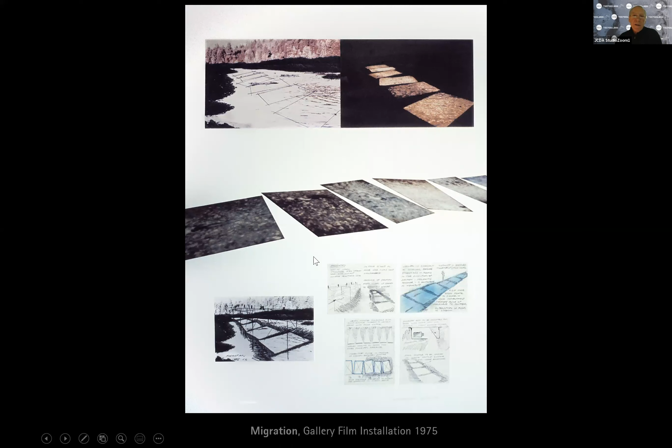Some of this early work, a film done in the mid-70s, early 70s, represented in New York at some galleries and in Europe, was a film installation dealing with the migration of salmon, with a series of film frames, a gantry built over the river with scaffolding, and a series of films shot down into the surface of the river that capture the movement and migration of fish up through this small river managed by the University of Washington.

The intent of this is all about studying qualities of light and understanding how our eye tends to focus on certain components of the visual information field in front of us.

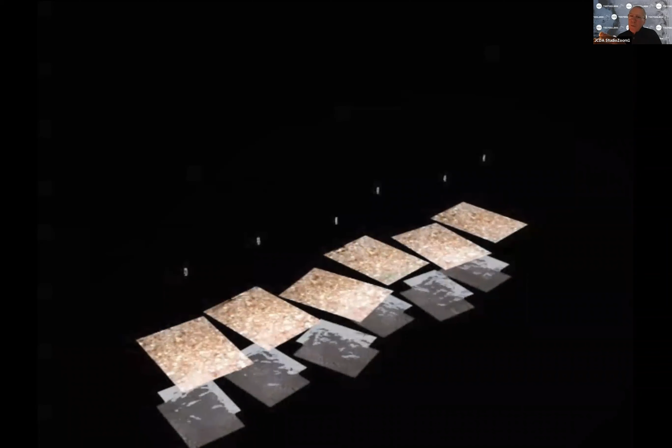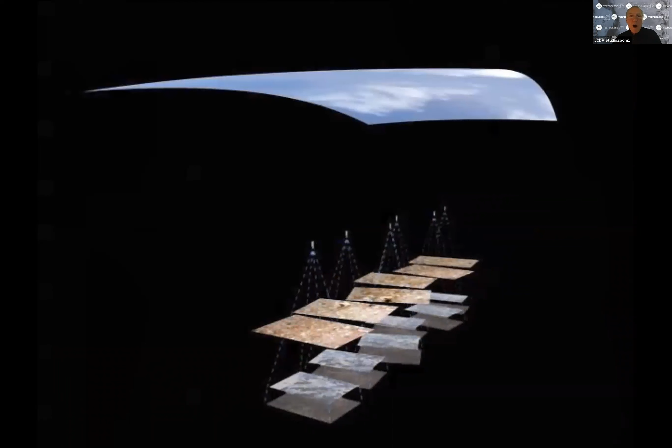And this sequence that you're seeing in real life is probably about 80 feet long, shown in a gallery where you walk into the space. You're essentially standing next to this river, observing this event happening. And by slightly altering the timing of the films, what you begin to realize the longer you look is that the information you're seeing is not necessarily just the movement of the fish below the surface of the river, nor the bottom of the river, but in fact the reflection of the sky overhead.

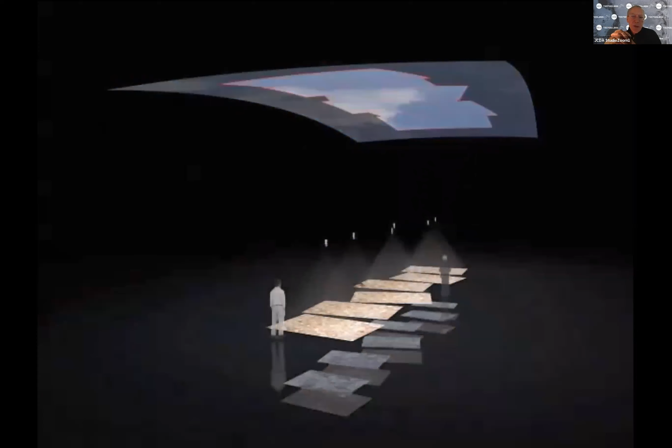So this idea of multiple fields of information overlaid on each other, both the reflected image and the image contained within the material, the image seen beyond the surface - this idea of layering of information, layering of fields or qualities of light, is really what the work is about. In this instance, this idea of migration really captures this way of extending our understanding or ability to understand a context.

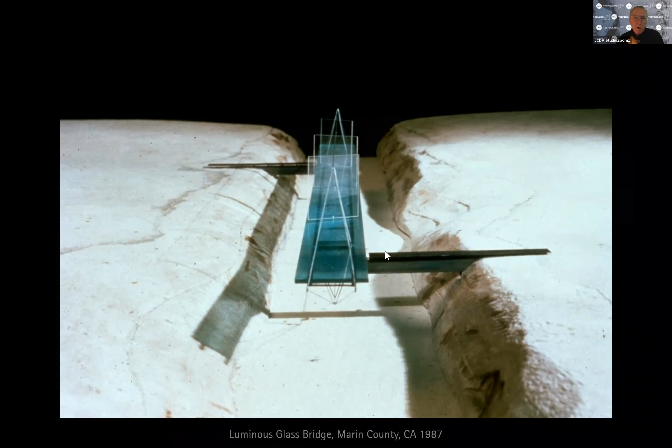And in that moment when you're actually moving or crossing the river, you're moving with the current or against the current. The whole idea here is that the quality of light falling on the surface of the river reflects back up and creates this projection surface upon which you're walking.

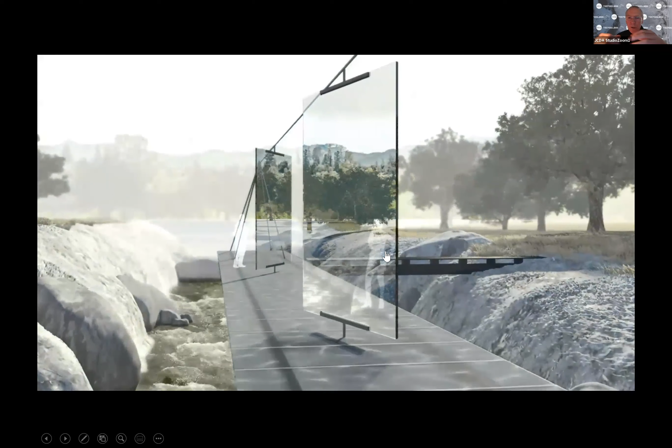This is a whole component of what we try to work on in the studio - how do you begin to get people more deeply involved in a particular ecology, have the moment to take a break within their day to realize there's something else happening. Try to have that realization become a moment of meditation, a moment of repose, or a moment of collective understanding of qualities of nature around us that we often don't pay attention to.

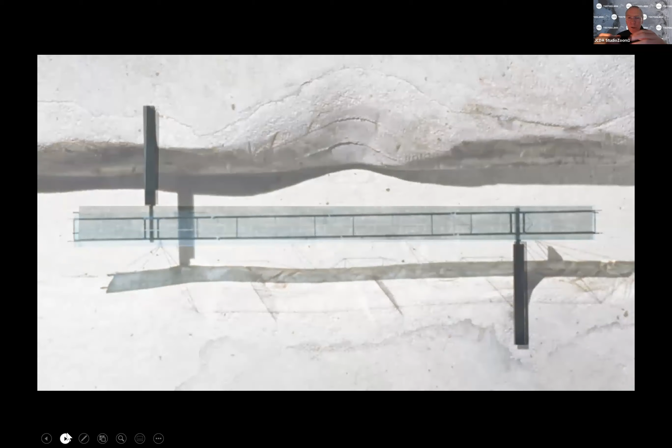These earlier projects led to other projects here in the city - this is jumping forward. I mix things chronologically here, but they're all linked together with this notion of light. This is a project here in New York with Foster, a firm we've worked with since very early, since the 70s. I worked on the Hong Kong project for them a long time ago.

This is one of several things we've done with them over the years - a building here in New York, the Hearst Tower, built upon this podium of the original building from the late 20s. If you look at this podium, you'll notice the original entry, a relatively small aperture into this stone facade on 8th Avenue, very close to Central Park. We worked with them on some issues of the clerestory and skylights around the space, but primarily on how you can bring light and the sense of light to the core of a building, inside the building.

Standing on the street outside the building, looking in, what you're actually looking at is an inclined surface made out of cast glass. The whole principle here is a very simple periscopic one - we're basically taking the daylight coming through the clerestories and skylights, bringing that daylight down to this glass surface. When you look from the street, you're looking into the building, seeing this glass surface, but your view is in fact looking back out at the sky outside. So the whole notion is flipping the field of vision - that's how it works with optics and daylight.

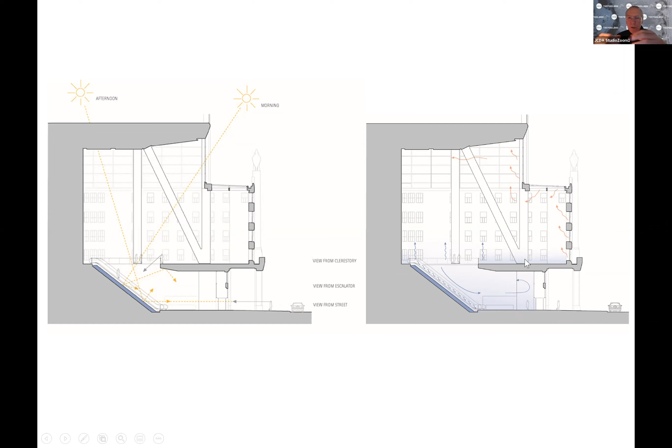So it's sort of creating a type of cooling where you're doing a stratification of cool air down where people occupy the space, and it cools the whole area.

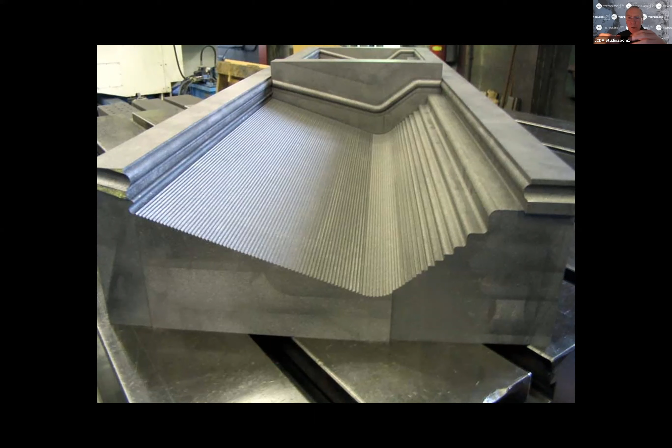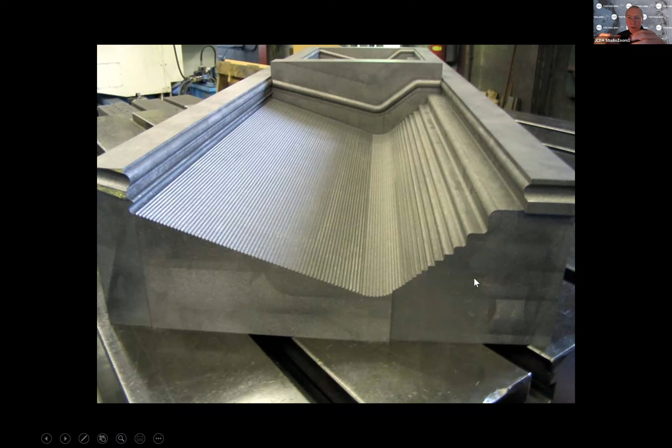But one of the programs I got most involved with, as you might gather from some of the images you've seen at RISD, was the glass program. A gentleman at Corning Glass Works in the early 70s had seen some of the work I'd done with film and glass together and asked me to come to Corning and work in their research and development lab with a fellow who was a very well-known glass and ceramic engineer. I ended up working with him for about 7 years on and off as a consultant to Corning, and learned an enormous amount about glass technology at a level you wouldn't necessarily have access to in the commercial glass world. So it's led me to do a lot of projects with glass.

And you're looking at a mold, basically a graphite mold. We make these molds and machine them out of graphite. All the details of construction are machined into the mold, and the mold is actually filled with molten glass.

So here we are — this is obviously the Hearst Tower in New York, a Foster building. This is how we actually produce some of the glass materials, where a machined graphite mold has the glass poured into it, and you end up getting these glass prisms that have all of the detail in them.

These glass castings are basically set up into the structure within the building itself, and it ends up creating this surface which bounces daylight from the skylights overhead and the clerestories out towards you at the street. So whenever you look in the building, you're essentially looking up at the sky beyond.

And as I said earlier, water from the roof of the building is brought down and chilled, and it basically runs down over the surface. So there's this whole idea of everyone entering the building sharing this particular experience of getting up into the main lobby of the building.

Other projects, going back a bit, have to do with working with architects — this is working with Vince James out in Minneapolis on a private house, where we worked with him on all the glazing and shading systems for the building.

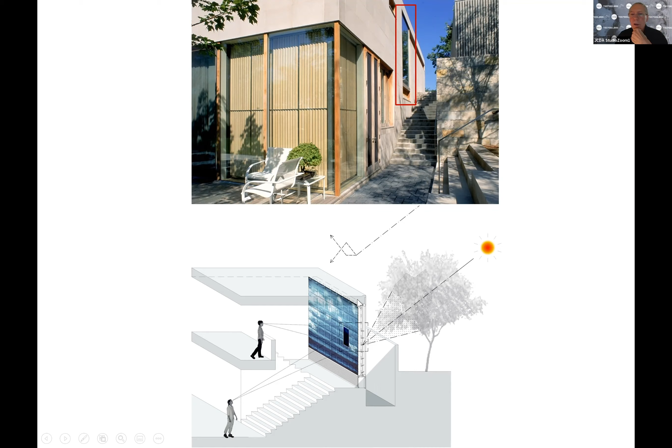This window posed a particular problem. You can see it's a window on the stairway going up to the second floor, but it's compromised in that it has no view — it faces directly a stone wall, a fence, and a neighboring garage, so it doesn't have the view or sense of intimacy they wanted in the building.

So the window connects back to this idea from the Hearst project — a periscopic view. This little mock-up you see on the left shows the sky overhead, with white squares indicating clouds. Those images are brought down into the window plane by a series of inclined mirrors, and a lens is positioned at a particular focal length from the mirror, which then focuses the image — as you see in the top left-hand corner, it's focusing the image of a tree in the distance, brought into the window plane and projected.

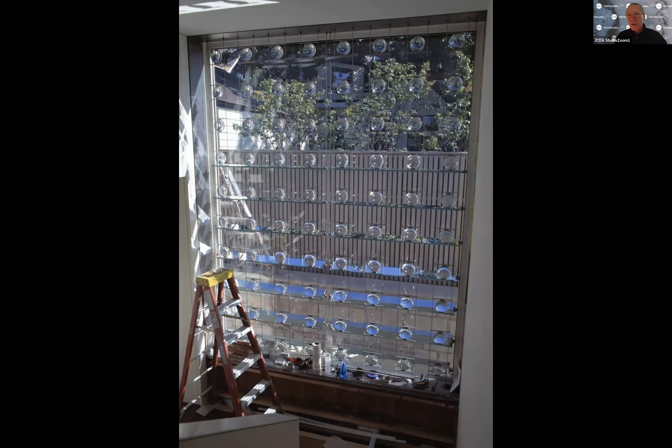So it creates essentially an optical device that takes various information from outside the building and projects it against this translucent glass surface. You end up with a reconstructed reality, almost a type of virtual reality outside the building, which raises the whole notion of how we treat windows. I mean, what Rudolph was mentioning earlier about how much glass there is in Miami and its use — but glass has this other capacity to basically construct its own worlds.

In this instance, you can see what's happening — you're getting an image of a tree in the distance, maybe 75 or 80 feet away. Looking at the top of the tree, you're getting direct shadows and projections of leaves from another area on the wall.

And then you're getting these sort of pinhole camera images of the sun as they come through the leaves, projected on the glass wall. So those types of windows bring up this whole idea that there's a lot to be done with apertures that we take for granted, just filled in with a piece of clear glass. Other types of apertures will be demonstrated on this project.

I'll come back to this tower, Tower 7, but at the moment we're talking about this project over here on Broadway, called the Fulton Transit Center. It's a relatively new transit center for the subway lines, the Transit Authority here in New York. We won a competition to work on this building with Grimshaw. Our whole idea was how to bring more daylight down to the subway system as a means of wayfinding and organization below ground.

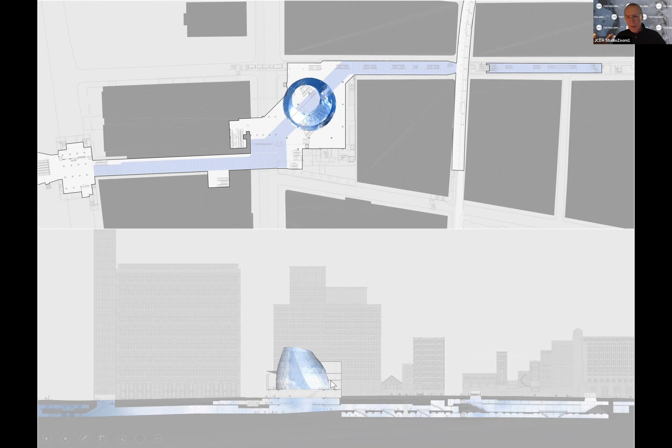The primary scope was in this head house, or main building. The geometry in this drawing was the original geometry anticipated for the building. But during the time sequence of this building, which was designed in 2004-2005, during the financial crisis in 2007-8, we had to go back and totally redo the whole design. This really wasn't finished till about 2015.

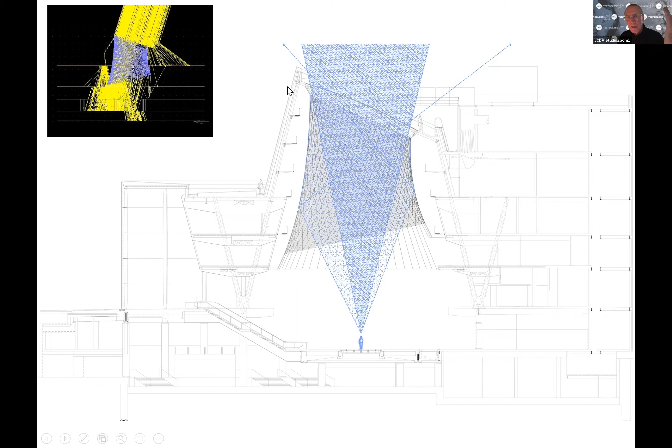Based on this idea of how one handles an aperture for a window, what you're looking at is a section through that main part of the building. Up above is an inclined skylight facing slightly south, and below it is this tensioned net that comes down from a compression ring at the roof line to the first floor slab. It's defined by a surface of optical aluminum.

I'll show you more detail, but the principle of this drawing is that if you stand below this and look up, normally when we look at a skylight, our view of the sky above is defined by boundary conditions—the width, diameter, or height of whatever the skylight might be.

But by shaping this surface adjacent to the skylight and using this optical aluminum material, which captures light and actually captures image, you can see what happens if I'm standing at the center and look over here—I'm actually looking at the sky at a great oblique angle. So the view of the sky seen with this structure is defined by the widest possible aperture. Instead of a narrow view of the sky, you're getting a full view of the sky.

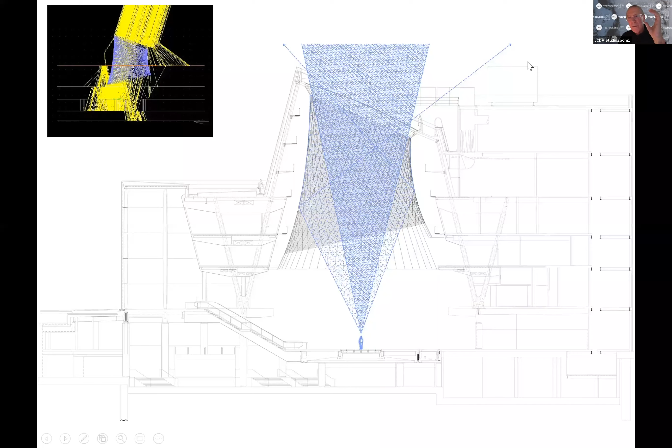This is before the net is installed. All those upper floors are basically fan systems that exhaust the smoke. This whole shape is referred to as a smoke reservoir in a large building. And the project is all built off-site.

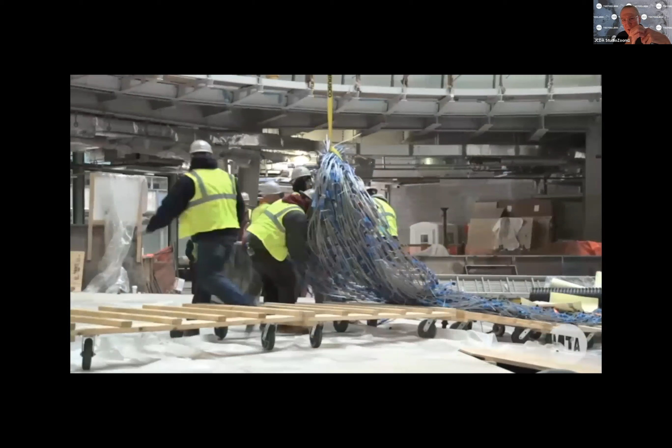It's a cable structure that arrives like a great big oriental carpet. It's all predefined in terms of the indices of the different cables, tensioned at the top, tensioned at the bottom, and then these panels are essentially applied to this very lightweight cable net.

The purpose of the cable net in this instance is that it completely steps around the problem of most large-scale infrastructure projects—you're only on site for a very short period of time. You're not working here for weeks and weeks to do this. It gets done very quickly. There's very little interface with the existing building, so whatever discrepancies there are in the existing construction, it doesn't matter. This just ties out at two locations, allowing you to create a completely separate, lightweight structure within the building.

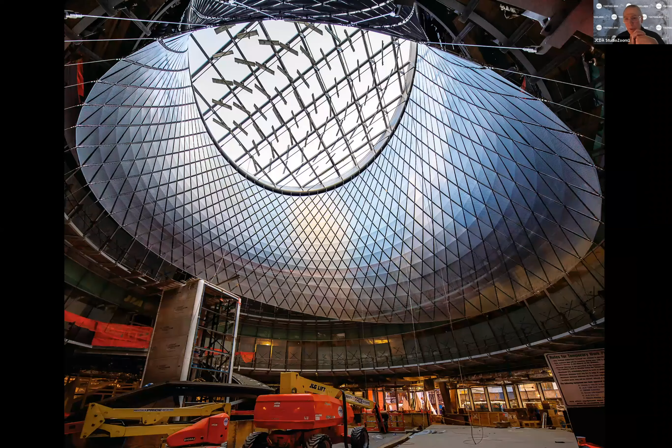Now, what it does, I think, is of most interest. If you look at this image still during construction—I use this one because the space is a little darker down below—what you're looking at here, if you can see my cursor, you're basically seeing a cloud. This cloud is in the sky, back behind you, way back over here. It's in a part of the sky you can't even see looking straight out of the skylight. Another cloud over here. And this is the blue of the sky, obviously.

So the whole idea here is that you're bringing the image of the sky, folding it into the building itself. It's no longer thinking of the sky being in space with you, like through a mural or a painting on the sky. It's sort of harking back to the notion of Greek theater, where you are under the sky. In this case, in an urban environment, you're bringing the sky into the building.

So the people gather here and walk through the space. It's honestly a type of view of the sky that you do not get in New York City any other way. If you step out into the street, your view of the sky is completely confounded by all the tall buildings and interruptions. You never have a sense of reading the sky as you would if you were outside of the city in nature.

So that's what's happening here. You're reconstructing an image of the sky and changing people's connection to it in an urban environment. That whole collective potential of having a work excite people, it's a moment of meditation or engagement for them in an everyday experience, I think is quite important.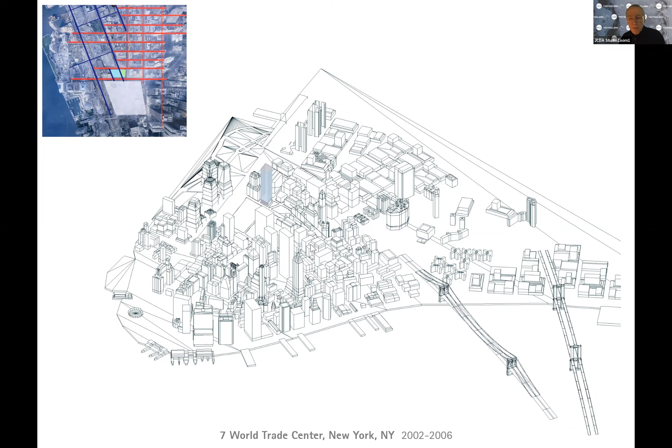Actually, it had a large oil storage, fuel storage in the basement, caught on fire, and the building basically collapsed in on itself. So this building was the first one built after 9/11. It was everyone's desire to have this building be emblematic of the quality of construction and a more public-spirited building presence on the street, as opposed to the original World Trade Center, which was a super block elevated above street level and was really an obstacle relative to pedestrian engagement.

So this was obviously understanding that the roadways would be re-established. They had been cut off previously. And our work here was very early on, hired directly by the owner to work with Skidmore on what could this building be in terms of having an activated surface, or a surface that engaged with people.

So the base of the building is about an 8-story concrete vault system. It's actually a power substation, an occupied structure, with the steel structure for the tower above it. This lower part of the building, wrapping that power substation, is a system that's really made out of prisms.

Again, these are stainless steel prisms that have a slight finish on them. It's not polished, but it's a little bit like the quality of the material in that Fulton Street Center. You want a material that holds the light. You don't necessarily want reflected light. You want the light and image to reside on the surface of the material.

In this instance, this is the original drawing, which talks about how you can program the surface of the building to respond to available apertures in the sky plane surrounding the building. So if you have an opening between tall buildings, how do you use that field of light to activate the skin of the building?

So working through a whole sequence of models, which we do to study these ideas, we ended up with this idea, which is basically two screens. There's a heavier screen on the outer surface and a finer screen on the inside surface. It's about 8 inches deep, which is the depth of the curtain wall. So there's an 8-inch volume that starts at the curb and goes up to 800 feet in the air. That volume is the area we're working in to activate the skin of the building, responding to light.

So at the base of the building, you can see the finish is slightly muted. It's put together with a company we've done quite a bit of work with recently in Minneapolis. They actually make oil field equipment and filtration equipment for water, large dams, and things like that. They haven't really done any architectural projects, and these are all built by robots. It's basically a series of prisms, and if you look closely, one row of prisms is angled slightly.

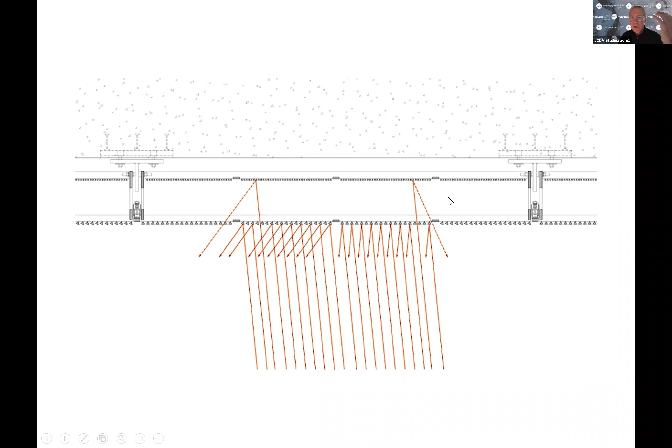The other prism is parallel to the face of the building, and this project is installed against that concrete skin. In daylight, the prisms that are perpendicular or parallel to the face of the building reflect one image, while the adjacent panel reflects a slightly different image. This outer skin deals with daylight.

The inner skin deals with artificial light. If you look at an early series of these panels going up on the building, you're not really able to see through them—your eye tends to reside on the surface. Even on the corner of the building, where it's a concrete vault system behind it, your eye stops at this surface, even though the wall is 50% open, because one prerequisite is natural ventilation, allowing air to flow through the wall to cool the transformers. But your eye still reads it as a solid.

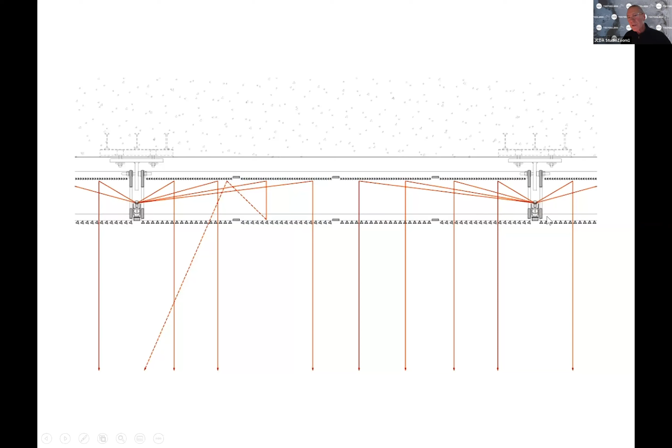In the evening, a series of LEDs illuminate the inner skin of the building, and the same skin becomes something quite different. It's actually linked to a camera recognition system, so it responds to the movement of people around the building.

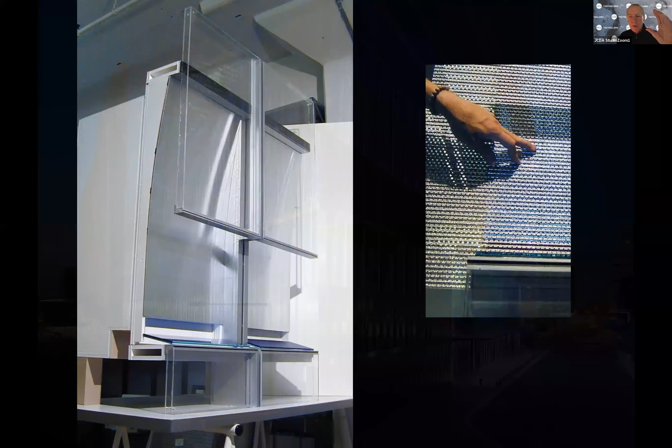The curtain wall of the building is also a daylighting system, where the glass panels run floor to ceiling—the ceiling above passes the floor line of an office, overlapping the spandrel section, which is the structural section of the building, and then the next level starts again below. The spandrel area acts as an open daylighting reflector, like a slightly curved panel, with an inclined reflector at the base.

You can see on the right-hand side there's a blue color. Daylight comes down and bounces off this, and you're basically bouncing blue light back up into the shadowed area of this corrugated surface. So when you look up from the street, you see these as blue panels, designed to merge with the blue of the sky around the building.

So this idea of depth over the whole skin—at the base, it's light on the outer skin as daylight, and light on the inner skin as artificial light. On the tower, you get light on the outer skin reflecting off the glass and a view of the sky off the glass, plus a secondary quality of light behind it. You're essentially layering glass, which is something we work with a lot—this whole notion of volumetric light.

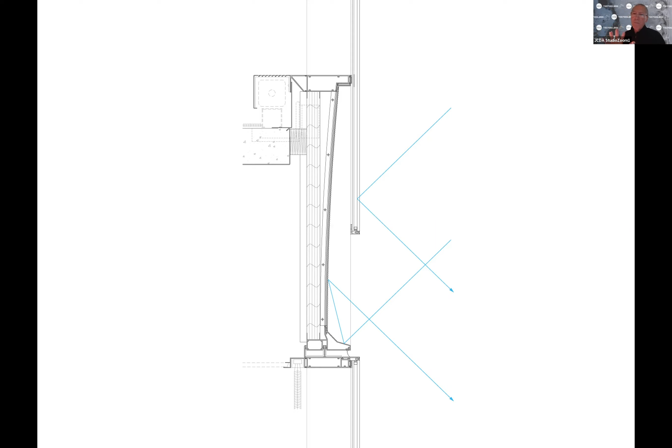This is critical to how one works with glass: the glass plays with multiple effects overlaid on one another, so your eye has a much richer and more active surface to read when you look up at it. These are full-scale test mock-ups you look at when building a large-scale building like this.

This is basically how that daylighting reflector system works over a 700-foot tall tower. If you walk around this building in the daytime, it's always responding to the sky in very rich, different ways. People see this from several miles away, or uptown. But from the tower base looking up, that whole stainless steel skin merges with the other daylighting system above, making the building very responsive to people on the street and to its particular lighting conditions.

Jumping to quite a different context in terms of scale—we've done several projects in the Mideast, and with Vince James, we worked on the American University in Beirut campus expansion. This is the campus in Jerusalem at the Israel Museum, where we were asked to rework the campus.

We were asked to make the campus ADA accessible. We removed several buildings and added about 5 new buildings to this very beautiful collection of work from 1964 by an Israeli emigre architect—those earlier buildings are his work. A very interesting Danish architect was responsible for additions back in the late 70s; his name is Jørgen Bo, who you might know from the Louisiana Museum in Denmark.

And then we were asked—this building was done by... it's skipping my mind at the moment, I'm a bit distracted by this whole Zoom conference call. But it was done by someone, and it houses the Dead Sea Scrolls—a beautiful little piece done in the early 60s as well.

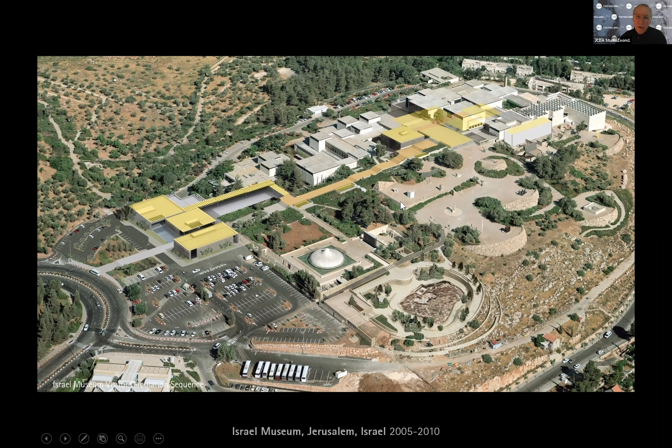Our work was redoing the whole garden, adding new buildings and a new underground passageway through the core of the campus, and renovating many of the older galleries inside. The idea was to keep the scale of the original buildings while working with daylight to create a very different extension and connection.

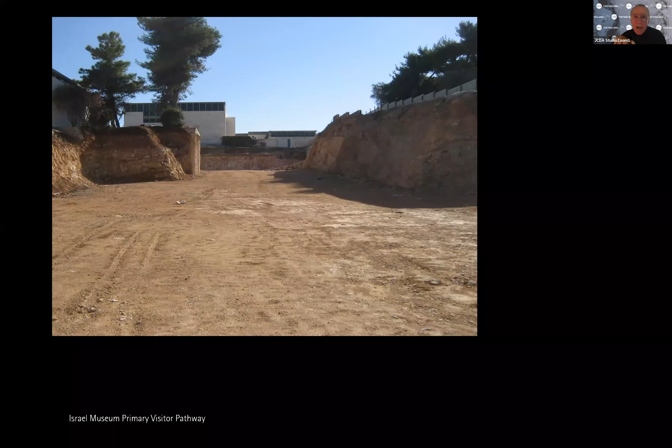So the excavation goes up through the center of the campus, into which we installed this route of passage to the core of the campus. And this is the new entry into the museum below ground, in that environment you just saw.

The difficulty with the campus was that it exists on a hill, called the Hill of Tranquility, a very beautiful hill surrounded by a sort of arboretum. The difference in elevation from the entry up to the actual entrance required climbing all these stairs.

That difference was about 45 feet. So what you're looking at here is a tunnel where you start about 18 feet below ground and end up about 60 feet below ground, and the challenge was keeping this whole daylit environment feeling continuous and connected to the gardens and courtyards adjacent to it.

These are the original buildings, so we wanted to stay at this sort of scale, which works very beautifully with the landscape. As you can see, the original buildings were actually all concrete, then clad in Jerusalem stone.

Obviously the way they dealt with daylight in those days was to the west, south, and east, using very narrow slot windows at the top of those boxes. At the north there's maybe a deeper daylit area, which still gets daylight at that latitude. But anyway, you try to cut down the light through the narrower windows.

But we developed a system for these buildings. This is basically a model of an extruded terracotta piece that you'll see used on the east and west elevations, and this particular piece is used on the north-south elevation.

So these are louvers, but they're really not louvers—they do several things at once. Here's the east-west one, oriented perpendicular, clipping onto the building. This is a vertical surface with a slight aperture carved back. Same on the north-south side: a vertical section, then a deep, slightly curved horizontal section.

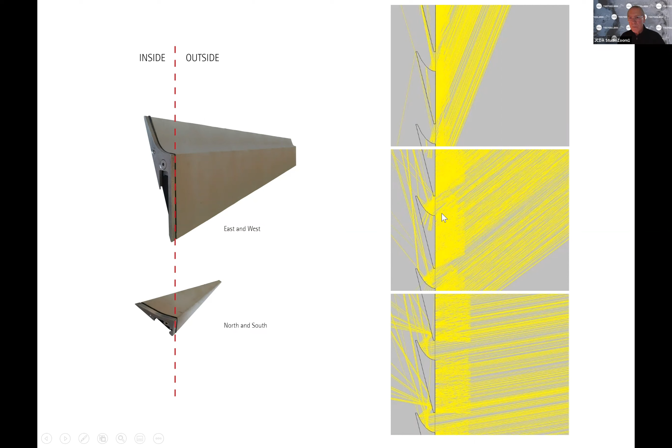This is what it does with daylight. At a noontime angle hitting the east-west louvers, light comes down at a sharp angle, hits this cove, and that light bounces up to illuminate the inside surface with bounced light. So it's actually a shading device, but it's also a lighting device. All of the inner spaces are indirectly lit by this reflected light off the inside surfaces of the space.

The advantage of this is the east-west louver. This is a mock-up here in our studio—you can see them configured. Daylight hits this curve, and then you see what it does on the inside. You have no direct view of what's going on outside, but you get the color of trees, the movement of leaves, the movement of people. There's a different type of animation, more cinematic, coming through the wall, and it obviously downscales the intensity of light in the environment.

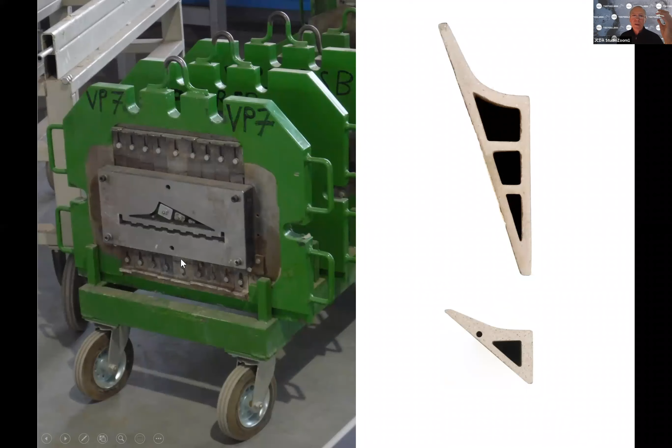So this is sort of what you see—the actual profiles, very similar to extruded terracotta, projected outward.

The campus was oriented north-south ideally, which led to this solution. So this is the north-facing part of the building, and this is south-facing. They use a very slender louver, as you saw, so you can look right through in the daytime. The original buildings were all concrete, so you never knew if the museum was open or closed, or if there were activities going on.

So the whole idea here is to put it right out front on the street, right across from the Knesset building and now the National Library by Herzog & de Meuron, across the street. You can actually see there are activities in the building.

These are the north-south louvers you just saw—you can see out, they're connected to the landscape. East-west, you have a denser louver.

The glazing here is simply laminated glass, totally clear, uncoated, and you're working in the Middle East. We were able to reduce the mechanical systems for this building about 30% because it gets no thermal heat gain. It's a very simple, traditional principle, just rendered in a different way.

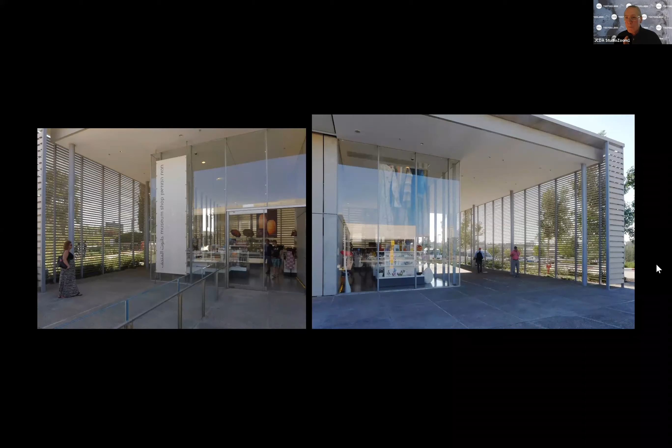So here it is, you just see this uninterrupted connection into the garden, which was done by Isamu Noguchi, actually. So very simple. Tried to use materials that related to the older materials. Created these outdoor trellises and green walls so that you could have this sense of a cooler environment.

This is where you enter that tunnel, basically, or that below-ground passage. You're down here, a garden on the other side, a courtyard. This is where people are walking to the upper part of the museum, up through that passage. There you are, coming out of that passage. There's a green courtyard up there, so you feel the connection to the landscape.

But in reality, ground is up here, this is the ground level up here. So you're that far underground, but you don't lose the sense of being in a daylit environment. And these are all, again, west light being shielded. And then in the evening, of course, sort of that daylit quality.

And then just a few things, I'll try to go through these quickly. This is about a project in St. Louis that obviously had a lot of its own many other challenges. This is done with Michael Van Valkenburgh, with whom we've done quite a few projects over the years.

This is taking the national park, one of the earliest urban national parks, designed actually in 1948-49 by Saarinen, and not actually constructed till the early 60s—he never saw it complete. The landscape was done by Daniel Kiley, probably the greatest American landscape architect of the last century. Obviously it was a very tired context, and nothing had really been done on this over 50 years.

This is the excavation of the existing museum, what had been a parking garage converted into a museum back in the 60s and 70s. The project had to do with connecting these grounds, restoring all the park grounds, reconnecting people to the river, redoing this whole riverfront. Our task is the renovation of this museum and designing this entire new entry that brings the entry of the museum closer to the city.

So the city had always been cut off by this six-lane highway here, with surface roads on both sides. One of the major elements of this project was covering the highway, creating a new landscape. This is Michael's work, and there's a historic courthouse just off of that park, so all of a sudden the whole project was to bring it all together.

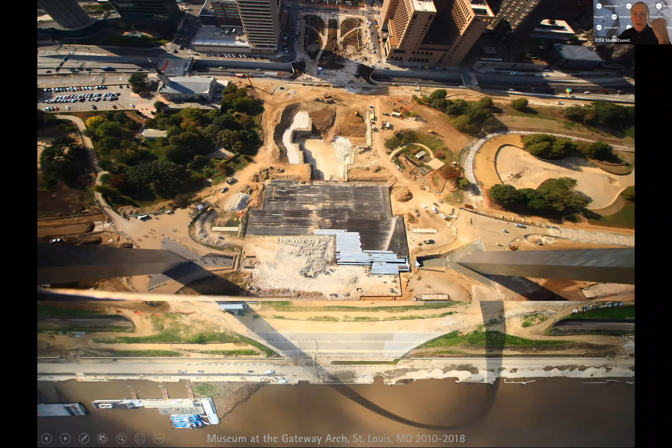The original entries were here at the base of the arch. Sectionally, the original courthouse—a very famous courthouse, the first courthouse in the west of the Mississippi—comes down, steps down, covers the highway here, steps down again, and then here's our work where you're cutting into the landscape, cutting in again, then dropping down and connecting to that existing building you saw excavated. So the new work is from about here back, and this goes down to the Mississippi River, connecting the whole town. Because the arch obviously is a monument, but it doesn't have a singular point.

It has two points of meeting the ground, so it's always this notion of leaving the center point open. Saarinen and Kiley had this whole notion of how one circulates through the landscape in a very organic way, where you're never just axially cutting through it. So we worked with that idea in designing the new entry, which you see here in plan, entering and going around this center point to the below-ground space.

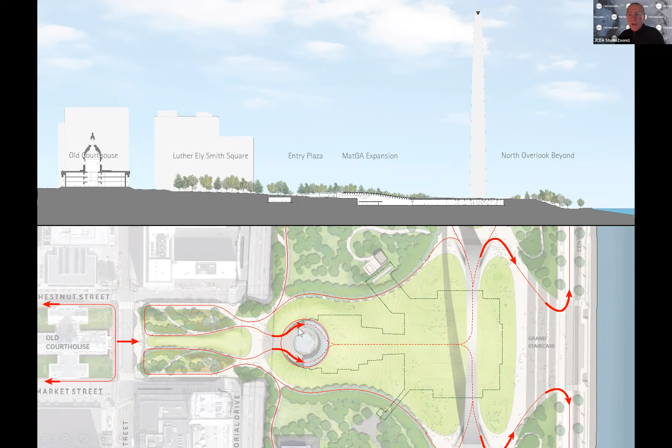This is as it existed before the project came about. You have surface roads, all the highway buffering, all the signage for the surface roads, these rather mean crossings, another surface road over here, and then six lanes below between those two.

This is the original - I have to say this is a listed landscape, so that's the original elevation of the Kiley landscape, which we couldn't alter. We obviously took it all away and had to bring it back to that same elevation.

So the project had to exist between that elevation height and the wall height of the highway. All of our work had to fit between these two elevation points, which was quite difficult. These elevations show the highway being covered, surface roads eliminated, excavation of the original buildings.

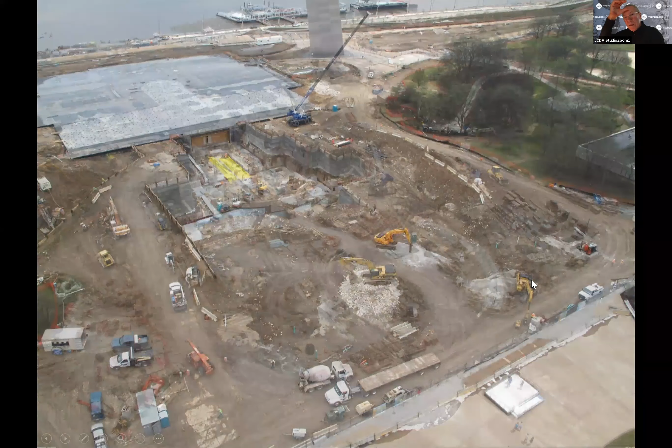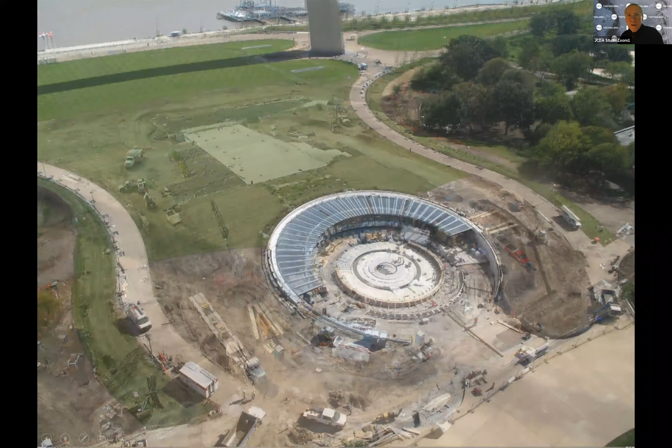The work on the excavation of the new space, you see some of the new entry forming here, and then as the work progressed, going through the project.

This is sort of the completed work. But again, that's this whole notion of circulating in - you circulate around to come in, or circulate down to the exits that come out of the arch now. So it's more of a one-way circulation.

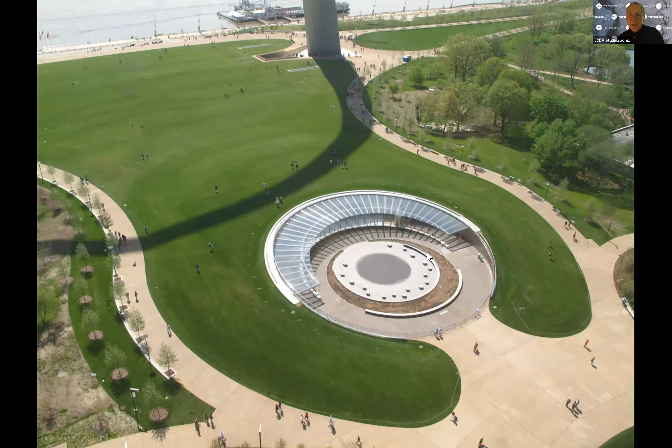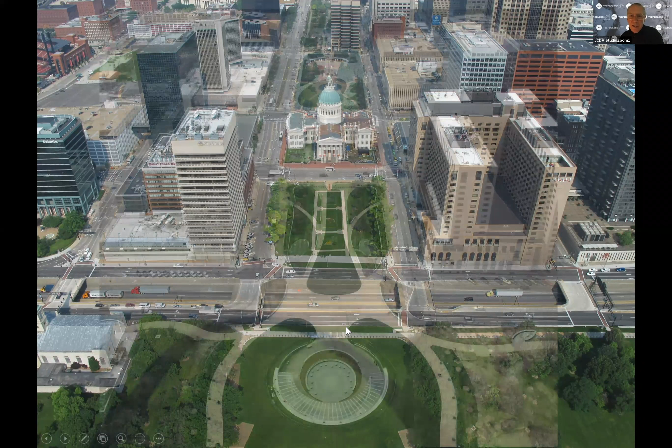From the top of the arch, looking back at that park - this is before, with the highway there, and then the completed connection of the park back to the city. So this entry is very low profile, but all of a sudden establishes this new public square, a place of gathering between here and downtown.

Here's an image of that interior space, with a daylit ceiling. Looking back, you can actually see the courthouse from the furthest reaches of the museum. And then this new established public space, done again with Michael Van Valkenburgh's office, and our component of it.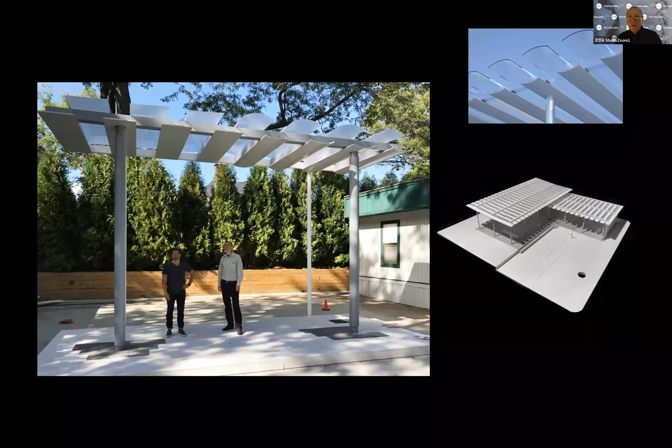So just two quick little projects to finish. This one, Harvard Business School, a very small pavilion commissioned by the dean of the business school. Funny enough, it sits within the quad defined by all these brick buildings, both historic and new, by many people we all know well - Stern for one - around it.

So it's one of the few modern pieces within this context, but it was meant to be a completely open pavilion year round, with some protection in wintertime where you can close off that translucent glass space. There is some heating there, but it's primarily oriented.

This part on the right-hand side is south facing, so when the trees shed their leaves in winter, it gets warmed up by daylight in the winter on that south corner, and is obviously shaded by the trees in summer.

But it basically serves as an adjunct to this large auditorium here on the right. You can come out here - there's a tent system that attaches to this where they can entertain for receptions or lectures afterwards. A very simple pavilion done in that context.

I'll leave you with this one last project, done for Stanford University a few years ago. It was a competition, which we prevailed on, but it's a project that was not built.

This is Palo Alto, and some of you who know the West Coast know what happens here: these mountains separate the Pacific, which is relatively cold water, and fog works its way up these mountains and drops over the hills in the evening. You get residual fog banks that cling to the redwood trees and surrounding trees, creating these very beautiful forms of light.

The commission was to come up with an idea for covering this amphitheater, not so little, it seats about 8,000 people, that's now been surrounded by many new buildings. However, the plantings around it have remained.

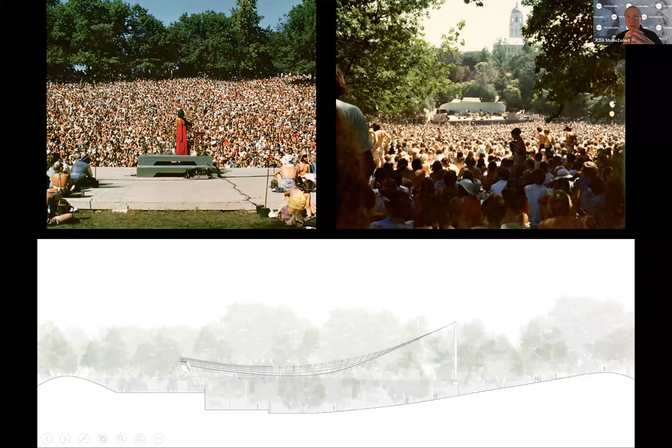This was very much a core to the campus originally. The Olmsted entry is just up here, so you're very close to the original campus. All the early great events at the university, all the graduations, used to take place in this amphitheater.

These are the great concerts in the 60s with Jefferson Airplane and The Who and everybody, Joan Baez, I think, here. But what the president wanted to do is cover an area, since there are trees intermixed with the seating, that would seat about 2,500 to 3,000 people, for a class or a graduation of one of the schools, like the business school or one of the environmental schools, without needing the whole amphitheater.

So what we did, you can see it in the section down below, is respond to the curvatures of the bowl itself, taking a form that nests down relatively low in the space, below the treetops of the surrounding woods.

Sectionally, there's a space for events at the back here, a storage area for the fabric roof that deploys, the new stage, and all the acoustical elements that go into the building.

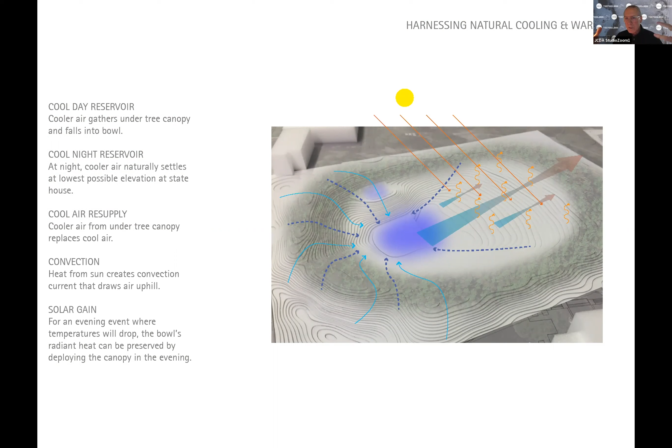It's actually designed, as many of our projects are, trying to work with natural systems, with nature, like in Israel, using natural ventilation on many buildings.

In this case, we use the cool air trapped below the trees. By covering the ground in summer daytime, we keep it cooler, then pull the roof back at night, allowing the cool air to drop down. You can change the temperature of this outdoor space by up to about 6 to 7 degrees.

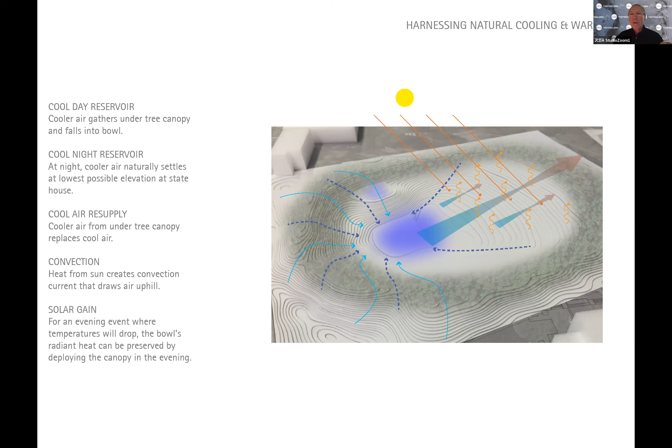And just the reverse in winter: you can open it up in the daytime, allow the grass to heat up, and cover it at night, holding that warm air down in the space. So this is the layout of that particular space.

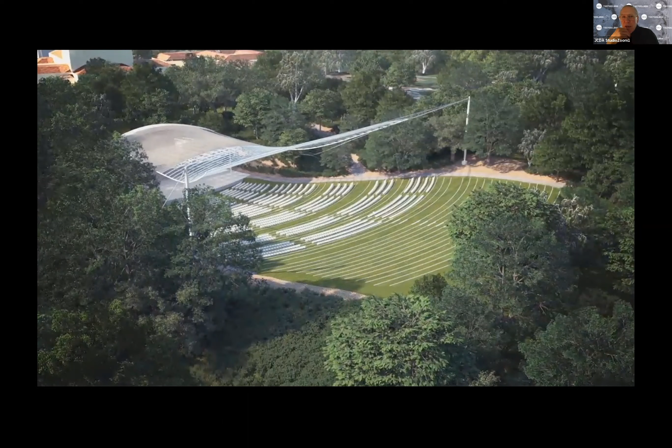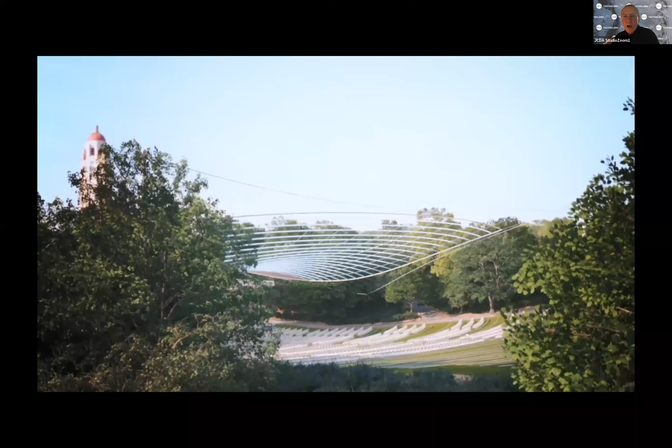I put this in as a closing because it speaks a lot about our aesthetic in our office. It's about trying to find ways of creating spaces which connect very directly to their context in terms of nature and ecology, and individually make people feel embraced by these works in a way that talks about tactility, community, intimacy, and shared experience. That's something we try to engage with in all of our projects.

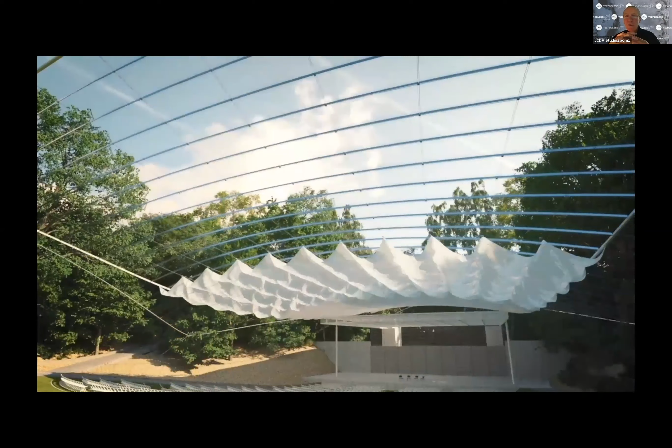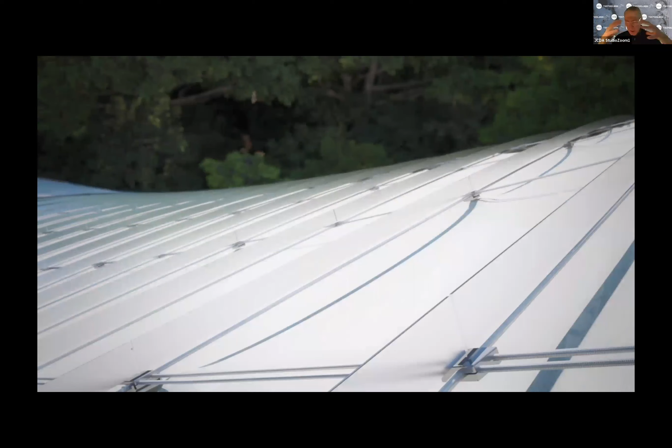In this instance, the fabric deploys in the space. It captures the sky overhead, but also captures the shadow of the surrounding trees, so it feels like you're in a much more intimate environment with a lot of activation, much like in Israel, how the movement of leaves or trees through the louver systems creates change. You might see the movement of trees or the change in sunlight as it falls below this at sunset, getting these raking shadows over the fabric and the roof.

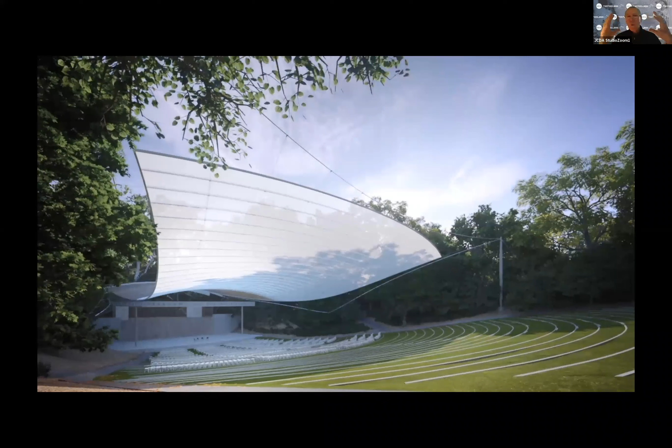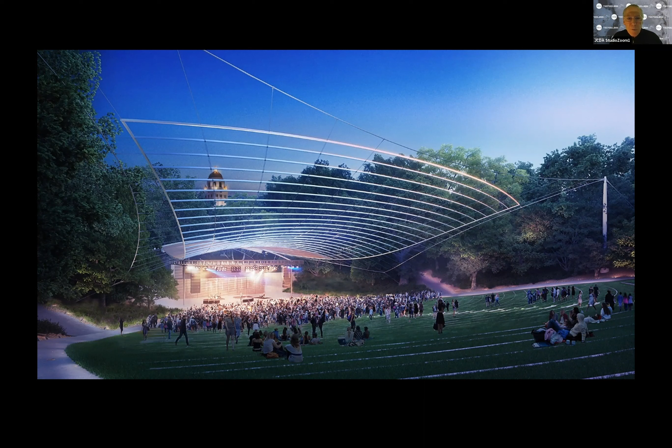We're trying to do works which are very sensitive and very well engineered and crafted, things people can enjoy with longevity, reconnecting us to elements we think are very significant in terms of improving our public spaces and our engagement with others.